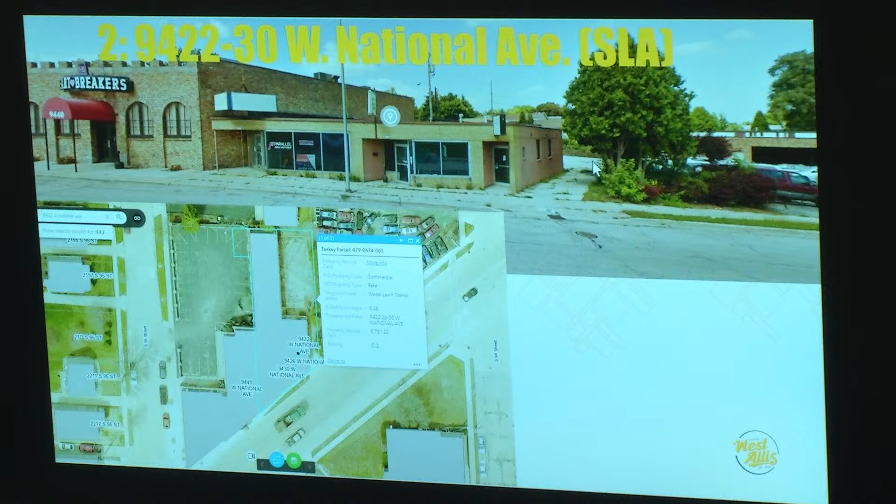It also happens to be the same ownership as the Heartbreakers building to the west. Recently they were separate owners, but now they're one combined ownership of the property. The proposal is to demolish this building, about 7,000 square feet, constructed I think in the late 1940s.

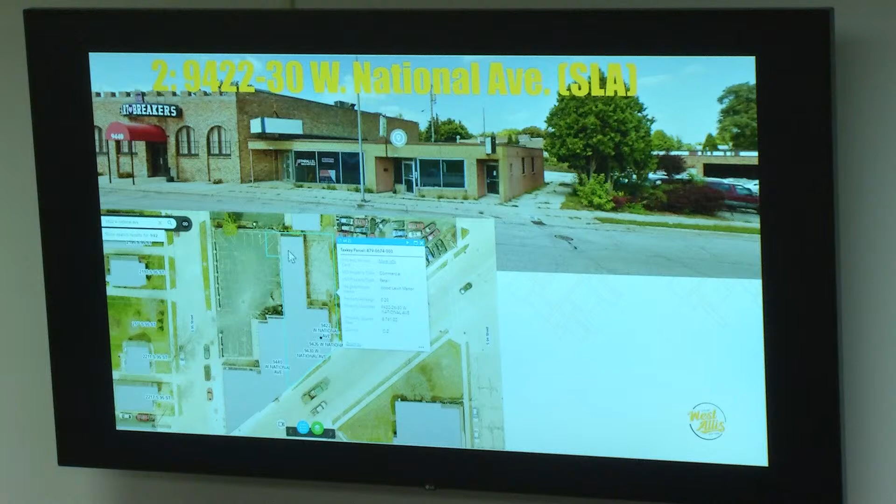The site consists primarily of building, with a small parking lot that'll be redone. The first step is to remove this building. It's an older, obsolete building, and Heartbreakers wants to consolidate and add some additional parking to help accessorize their use. They currently have a lease with the Humane Society across the street, and for safety reasons and to control what they have under their ownership, they want to consolidate parking on their property.

Let me just go back. This is a bigger view of the neighborhood. You've got residential to the north and west, and commercial along National Avenue. Lincoln Avenue is the major intersection just to the southwest.

Here's a different bird's eye view looking down at the building. This is the building that's going to be demolished. There's a residential home to the north, and I know that's been some concern over the years.

There was a prior proposal back in 2019 to demolish this building. The owner just didn't have the money at the time, so the project stopped, even though they had the approvals. But the neighbor has always been concerned that if you tear this building down, the soil erodes and the garage, part of the driveway, is going to fall off into the site next door. The plans submitted, and our understanding going forward, is that there will be an interim retaining wall as well as a more permanent retaining wall that comes as part of phase 2, and we'll get into that next.

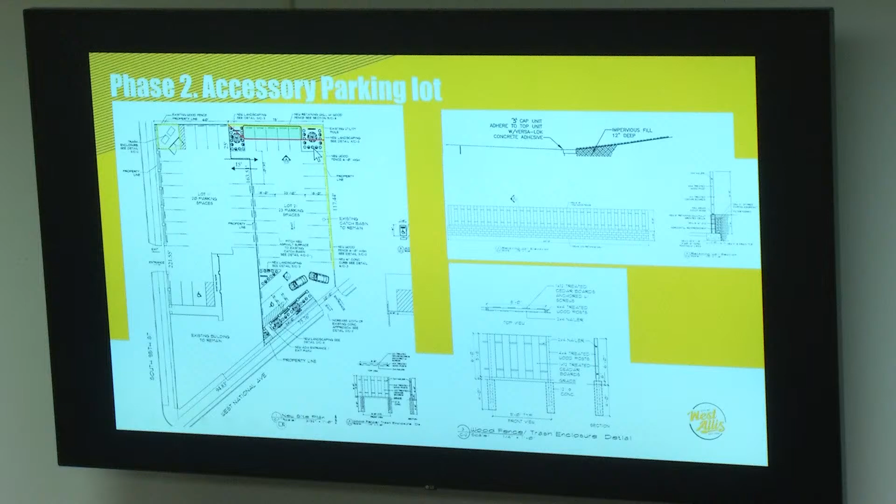That's the location of the future permanent retaining wall, and this is the interim wall that would be installed as the building's coming down, as this wall and this part of the building goes away. Those large 2x2x4 blocks would be installed here, again, so we don't compromise anything on the residential side and lose anything to erosion or load.

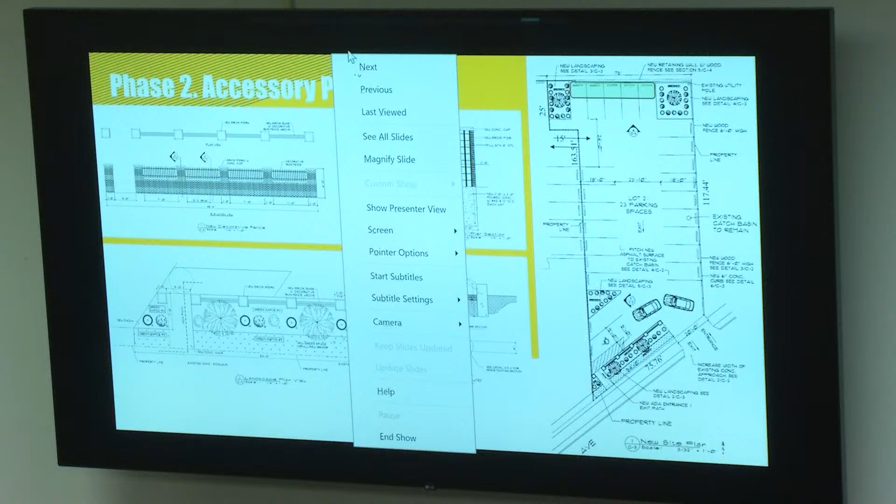Let me go back one, this might help. This is the garage to the north, and that garage is about 4 feet. The overhang is shown here, but the wall of the garage is about 4 to 6 feet north of the property line.

Here's the existing retaining wall that will eventually be replaced with a permanent wall. When the building goes away, the interim wall will go in right here, and then the permanent wall will also come across in this area to take the place of what the building is doing right now. There will also be earth in between the new wall and the property line, again to further stabilize that site.

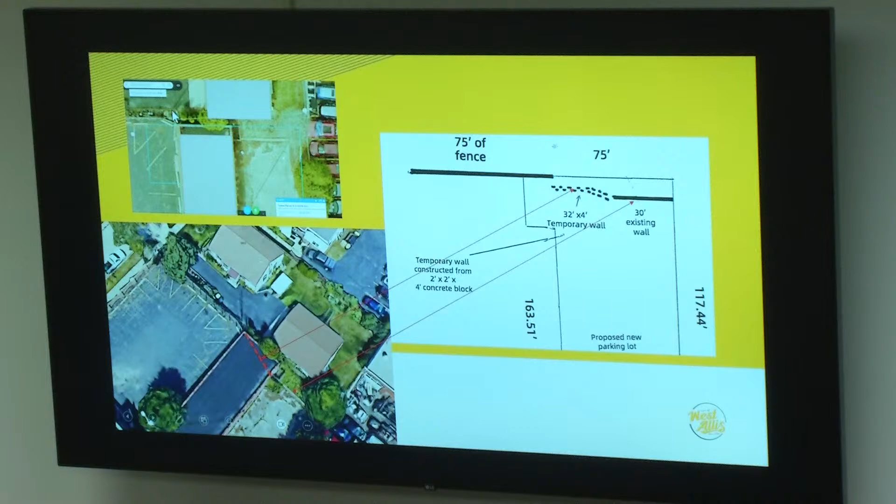The revised plans that we'll be getting as a condition of approval will be better at alleviating some of the concerns of the property owner to the north and further stabilizing the site for the future parking lot. And then just a closer view, what we're looking at here at the bottom is a detailed view of this landscaping island along National Avenue.

It features a decorative wall in the backdrop, and then landscaping, some ornamental trees and perennials and shrubs up in front, and then a small terrace of grass in front of the landscaping area, and then the sidewalk is here.

There'll also be a cut-through from the parking lot out to the public right-of-way. So if you park here or anywhere within this lot, you could walk out and then out to the sidewalk and into the main entrance of the business.

The wall will be a brick masonry style wall with piers and ornamental fence along National Avenue. And then this is the variety of landscaping that was shown. It's about 10% landscaping of the overall site. It'll probably be a little bit more with this added back in.

When this building goes away, there'll be a stain on the east side of this wall. But the idea is, where you take this building, I think there is a little bit of a gap between the two buildings. So this will be evaluated at that point, and the idea is to clean it up and, if necessary, reinstall brick to match on this east wall of the Heartbreakers building.

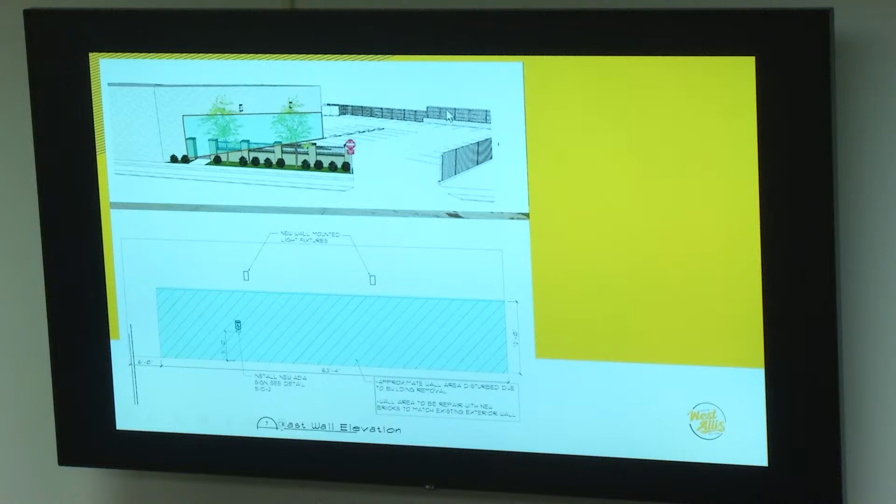So we're recommending approval, subject to the conditions in the staff report, I think on page 3 of your staff report, items 1 through 3, so we're breaking this up into 2 parts. The first part, the biggest priority is to start demoing the building.

We're asking for an estimated cost, a surety bond or a letter of credit, revised retaining wall plans, to work out some clarifications on the plan and show if we need more detail on the interim wall, and also the timing of when between the interim and then the permanent wall is going to happen. We want to get that detailed.

Other than that, once the building is down and the site's stabilized, before the parking lot can commence, the two properties, which are separate right now, the Heartbreakers property and the 9422 property, will need to be combined into one lot of record. It does have common ownership now, so that clears the way and makes that easier to combine them via certified survey map. That will require council approval.

And then we just wanted our city engineering department and planning department to get a little bit more information on the structural capacity of the new retaining wall. I think a lot of those concerns have been somewhat alleviated, but we're still asking for the structural integrity of the wall.

And then drainage needs to be explained, and then just clarifying some of the other details shown on the plan, just for a better understanding and comfort level of next steps going forward before the parking lot goes in.

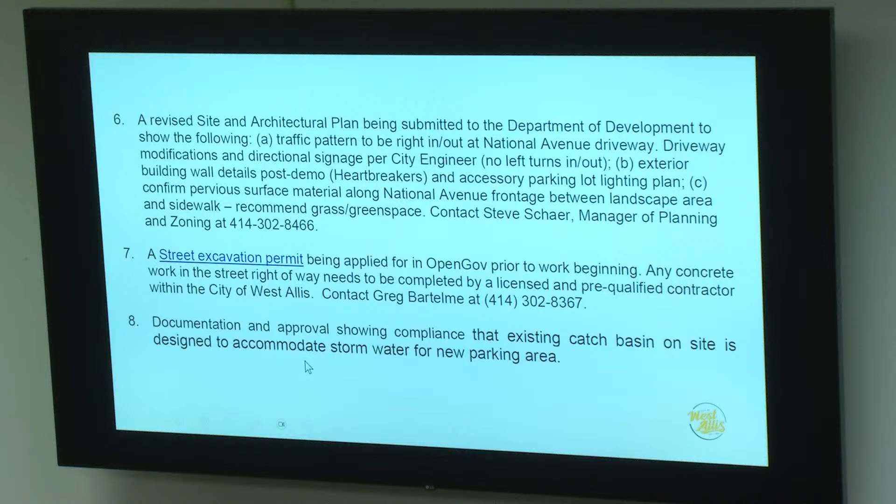Other than that, it's pretty much just standard stuff - getting the driveway or street excavation permit from our city engineering department, and just clarifying that the catch basin in the parking lot just east of the building that's going to be demoed needs to be sized properly. I know Mike's been taking a look at that catch basin right now, trying to get the right size lateral into it, so that'll be taken care of. But it's just a standard referenced item on this for approval.

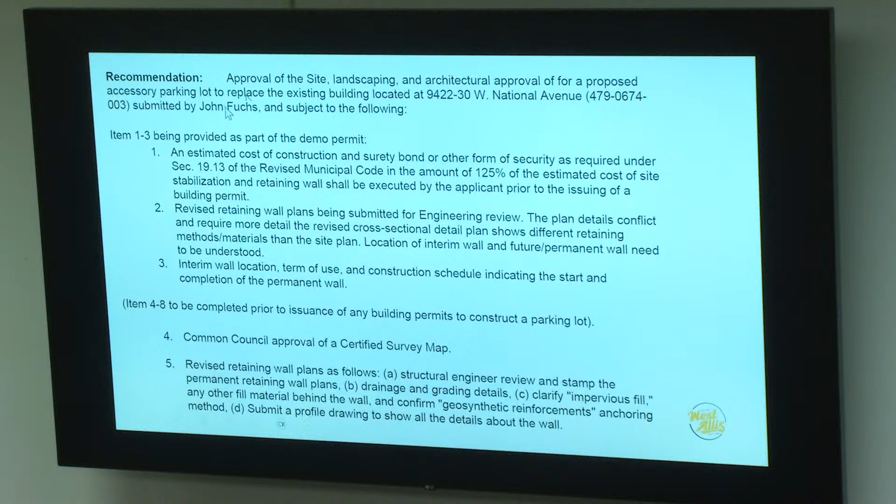So we recommend approval of items 1, of the demo and of the future parking lot, subject to pages 3 and 4 of your staff report, which are shown here. Thanks. Any questions? We can open up to discussion if needed.

Go ahead, Wayne. Mr. Mayor, thank you. Steve, go back to maybe the second slide you had. Sure. Is it this one? No, that one. Yeah, right there. Okay sure, this is outside, this is to the east of the subject property.

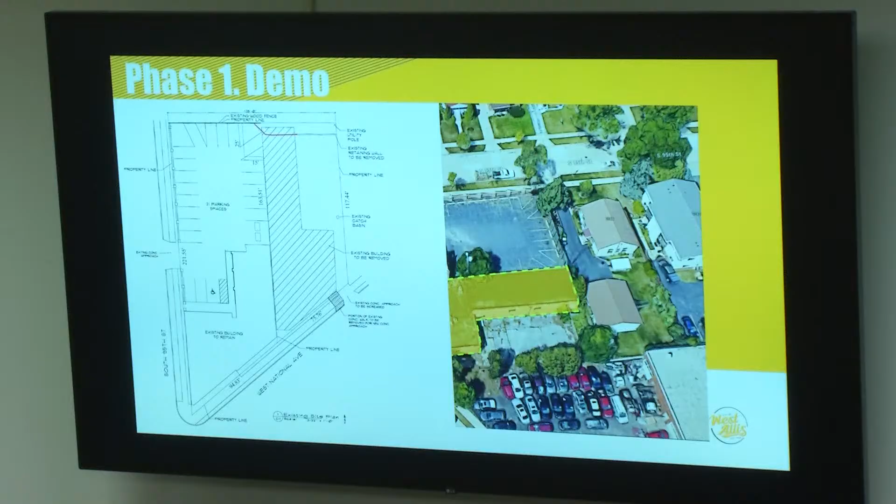What are all those cars in the lower section of that slide? Oh, that's the next door neighbor here at 9400 National. I mean, what is that? It's an auto body shop. Is that Concours, or is that? No, this one is the other way - it used to be Besson Auto Body, and now it's something else, new owner, new operator. It's been a thorn, I think, in the side of our code enforcement department and planning department for years. I'm not sure, now that picture here could be a bit dated, but it still looks like it - probably close to it. Maybe a few more cars, maybe a few less, I don't know, looks like about the same. It looks like a city junkyard. Yeah, NS Towing. Yeah, towing.

That would not be an acceptable condition of approval. Thank you. Sure. Any other questions, Brian?

Any addition, like for lighting or anything like that, as you're expanding out? You guys have - yeah, it's gonna be added to the new plans. It'll obviously not splay over to the property shown there, it'll be contained. Most likely it'll be added to the building, kind of like what he showed us, probably gonna be the best way to do it.

He showed on that, I think - there was some, on the top? Yeah, where were they here? Further down, I think. Right there, some, yeah, one here and one there. Okay, try to get one on the backside too, so it gets the other parking lot.

It'll be, I mean, it's really important to make sure you keep those splays downward as best possible. We've received lots of lighting complaints on some new projects, and especially with the neighbor to the north being up a little higher, some of their windows may actually be over the top of that new fence going in back here, so especially in the back, try to get those lights directed downward as best possible. I know you've got to provide safety for your customers coming in and out of the place, but at the same time, we want to be respectful of the neighborhood too.

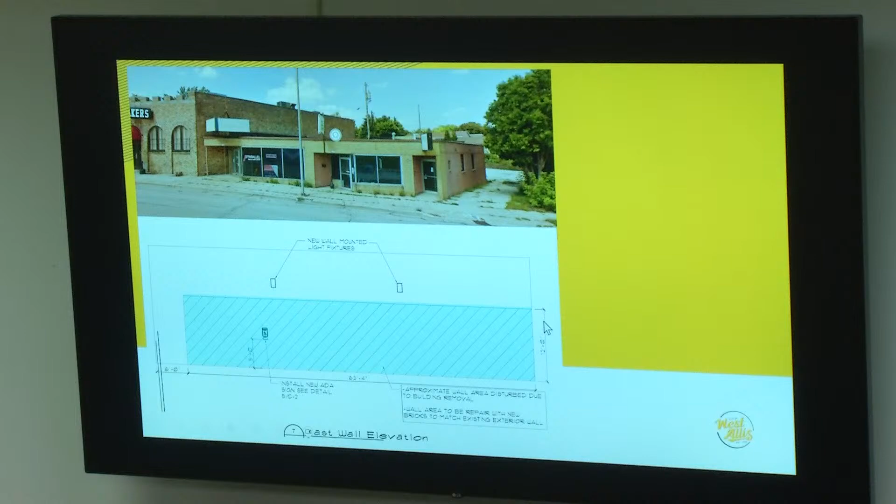Has the whole parcel been kept up and we haven't had complaints about their landscaping? It's been whatever's really not supposed to be there much — just some potted things, a couple spireas in the front, but it pretty much gets piled up with snow, so there's a couple spireas and some hostas, that's about it.

But is that the little square right underneath that first arched window? Yep, there's little 2x2 squares along there. It had some rotted granite in there for a while, but everybody throws their cigarette butts and everything else in there. What about the turnout of the parking lot?

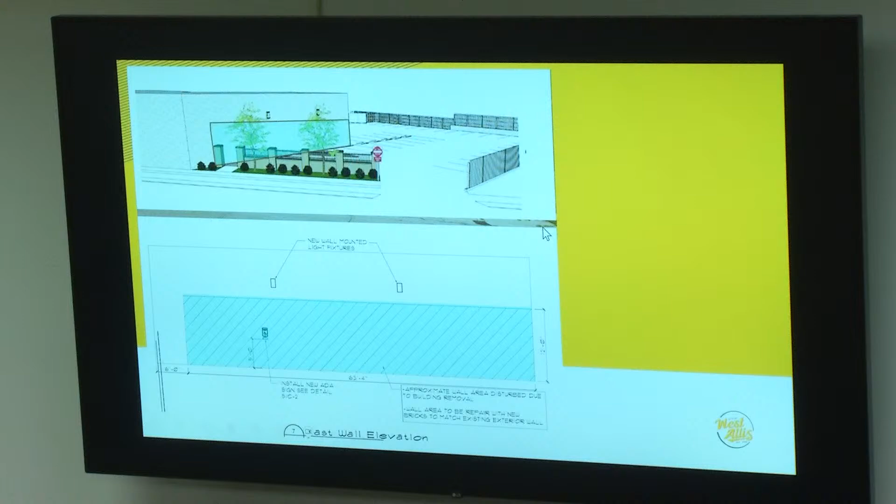Is there going to be any island or anything to prevent people from turning left? Well, that's what we're trying to reconstruct, as I talked to Steve. He wants a no left turn sign and all that kind of stuff up there. I'll have to talk to city engineering to see if there's maybe something that can be done when they reconstruct this drive, maybe a little bump or island in here to prevent that, because the new parking lot's gonna have curb and gutter on the outside anyways. So that's why they're doing the curb there and the curb in front, they can put a left turn or a right turn curb on there. I just think trying to turn left there, being so close to Lincoln and National, is pretty dangerous.

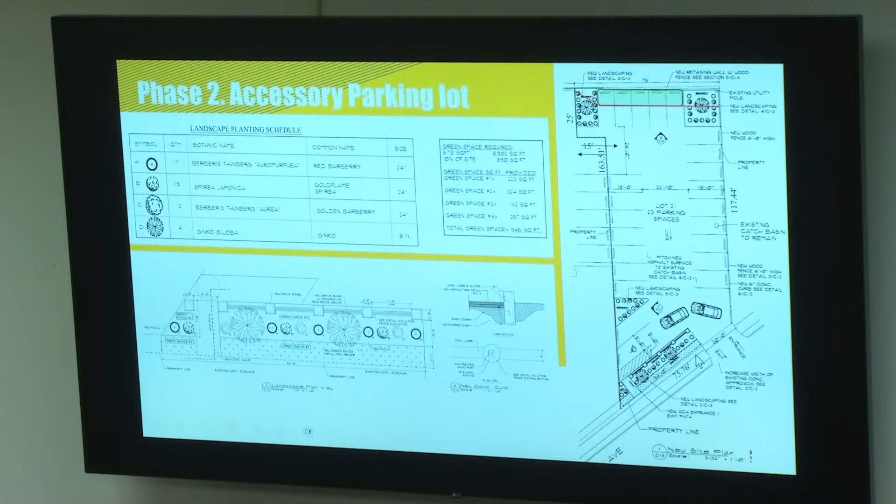Okay, any other questions? Any motion? I move to approve with conditions. I'll second. Conditions. Okay, we have a motion and a second. If there's no other discussion, all in favor? Aye. Any opposed? Ayes have it. Motion carries.

I think it'll look a lot better than what that building looks like right now, no matter what, so it's...

Mr. Mayor, the other issue regarding the turning, isn't that something, working with the city engineer, they could consider doing something like was done on Cleveland? That's good, that's what I was thinking. A possible island extension, do it ahead of time rather than wait for an accident. Oh, you're thinking within the street median itself? Yeah, like on Cleveland, west of Highway 100.

Seems to me that's certainly a barricade, you can't get around that. Yeah, that takes no prisoners. That part of National in front of Heartbreakers, it has been done. Does it go all the way east though? I'm trying to think how far it goes. I know Lincoln Avenue is gonna be redone, but that part of National may have already been taken care of. We'll see, as long as it's in the discussion, we're gonna be talking to city engineering about that anyway.

What if you just put some of those orange permanent things in there too? Yeah, I just wanna make sure it doesn't end up creating more work for our DPW department to pick them up every time a plow comes through or a car wipes them out, but yeah. As long as it's in the discussion, that sounds good. A couple of wheel spikes, so if they take the wrong way, I can only do it a few times, but everybody will stop. That'll learn them.

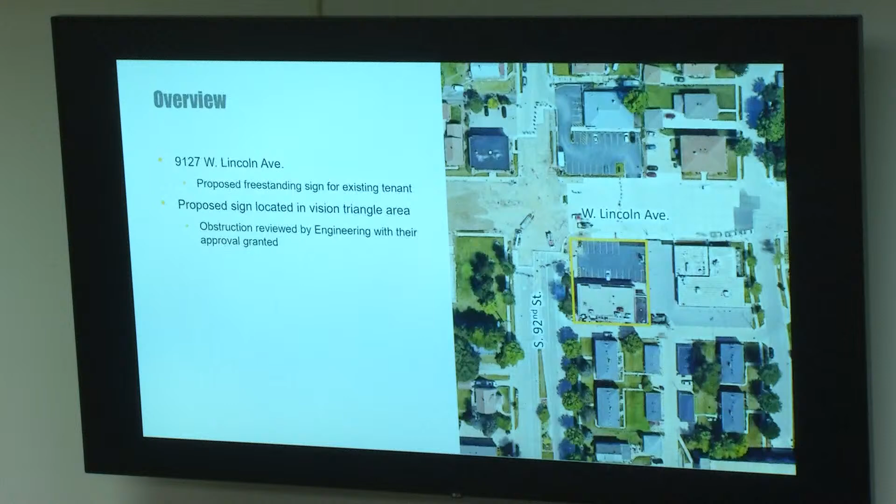Thank you, any questions? So, I'm sorry, it's at a point, so when you're turning, you can't see it? So it's at a point, right here, when you're going either north on 92nd Street or west on Lincoln, it's at a point where you don't have full view of the vision triangle, but the way the sign is placed and angled, it conforms with our safety guidelines per the engineering department. So is it gonna be angled like... Yeah, I think so, they'll flip it for this.

It's kind of like the back—it's kind of hard to see, but the yellow is the vision triangle, and the red is the sign.

They're going to have to flip the sign to conform with our engineering department's guidelines. They'll just take that 180 sign and mirror it, whatever it is.

Are they adding height to that sign that's currently there with this or not? They're removing the current sign and replacing it with this signage. It's just a basic mock-up of the signage.

They'll have further graphics, but that can be approved at staff level, and the signage conforms with all our zoning code requirements. It's a like-for-like copy of the sign on 92nd and Cleveland, which was approved last year by Plan Commission.

So that's not the actual sign—this is not the actual sign. Staff has the ability to control the aesthetic design of that further.

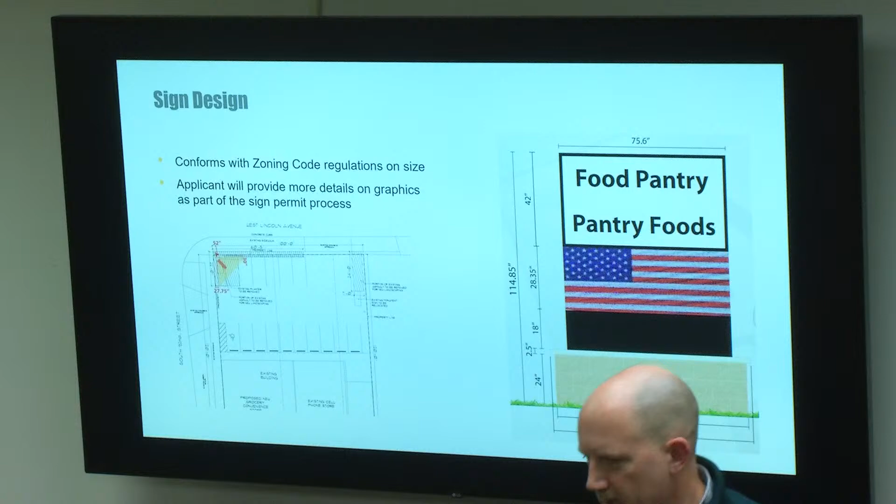Kind of like this sill, just add it to the top. So those are the kinds of things—we're here for the appeal mainly, but those are design details we'll work on with the contractor.

On the actual aesthetic, he responded that they'll be able to conform with our request, whether it's a better design or a new design in general. This is just for the location of the signage. Since it's near 92nd and Lincoln, we want it to look nice.

Yeah, go ahead, Wayne. Thank you.

This appeal is because we rejected this very sign earlier? No, this appeal is because they have a current sign, but it's smaller and outdated for what the applicant and property owner would like. They're proposing a new sign, and because it's within the vision triangle in our code, they're required to go before Plan Commission to appeal that location, as long as engineering deems it acceptable.

And the existing sign to be removed, where is that? It's about right here, not diagonal. Well, there's another one too, I think, on the north—what is that, northeast? Both of those will come down?

Yeah. Yes. Thank you.

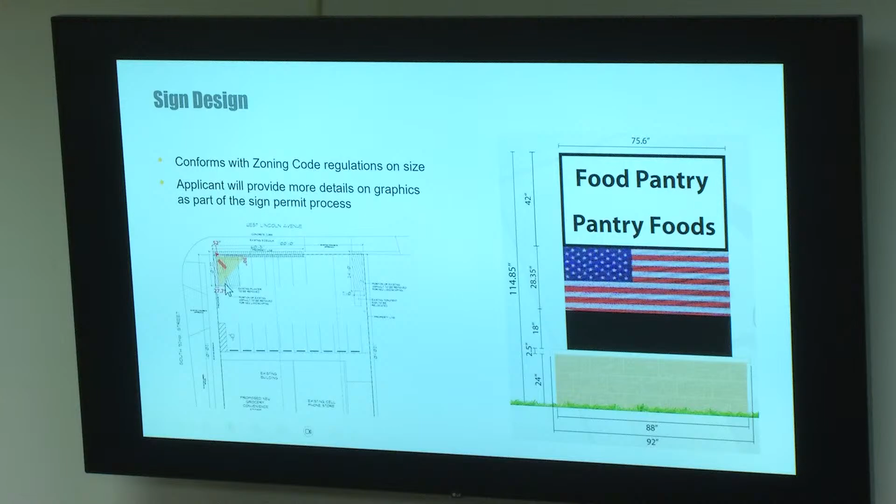Any other questions? Move approval. Second. We have a motion, we have a second. If there is no other discussion, all in favor please say aye. Aye. Anyone opposed? Ayes have it, motion carries.

We'll move on to item 4. Our next item is a certified survey map for the Michael's restaurant property. The Michael's restaurant property is here, and then back in—was that December or January?

I think it was December. They were here before the Plan Commission seeking conditional use approval for a food truck park that looks like this on this corner over here.

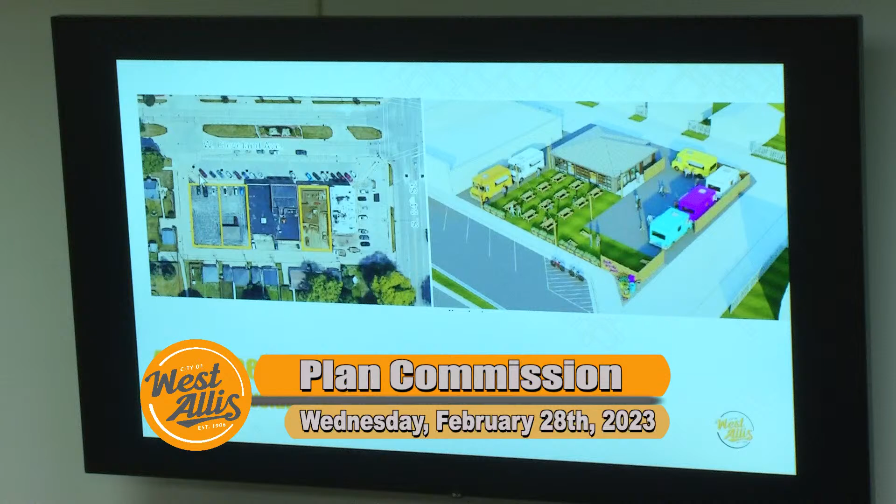This is owned by the same owners as Michael's. The food truck park is actually two properties. It looks like one parking lot with a garage on it, but there's actually two parcels—one with some parking and a garage, and another with just parking.

Once consolidated via CSM, it would set the stage for one property upon which they'd add onto the garage for ADA men's and women's bathrooms, an expanded tavern area, converting the garage to a tavern for the food truck park, and building out the outdoor patio area and space for the food trucks.

I'd move approval of the site. Second. Thank you. If we could, just approval subject to technical corrections—we've got to take that to common council again too, so subject to technical corrections and common council approval. Thank you. Sure.